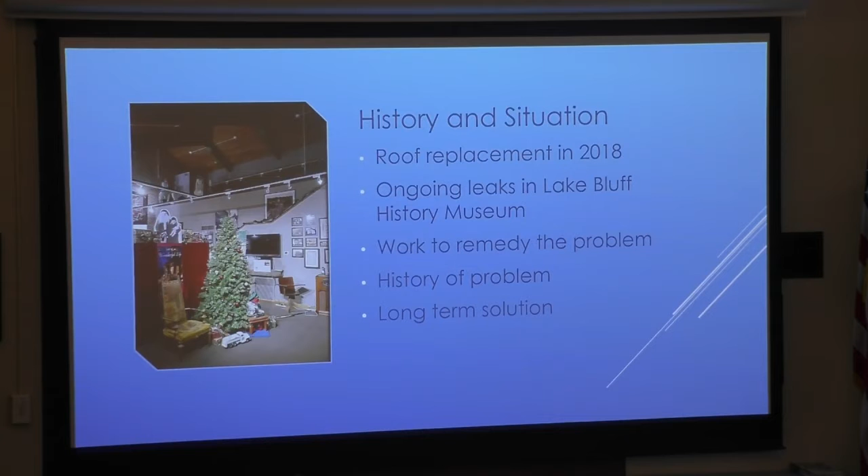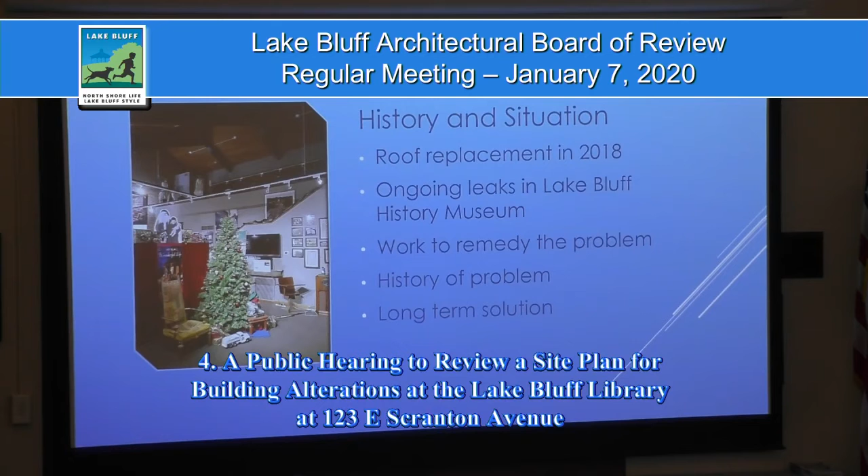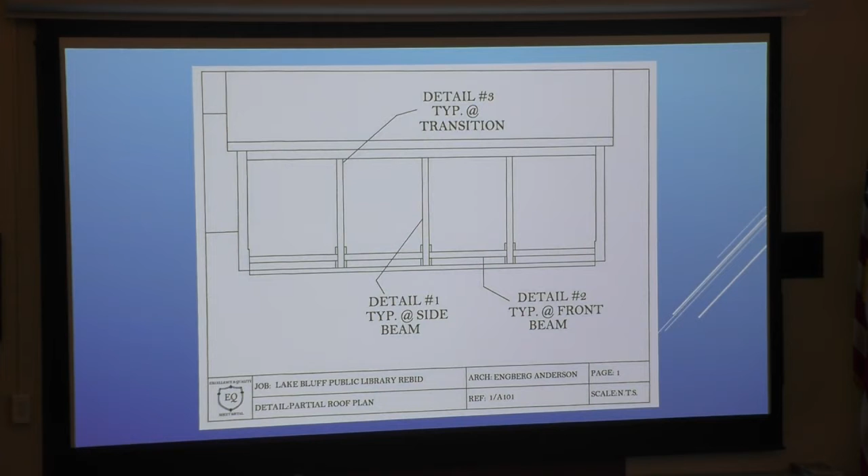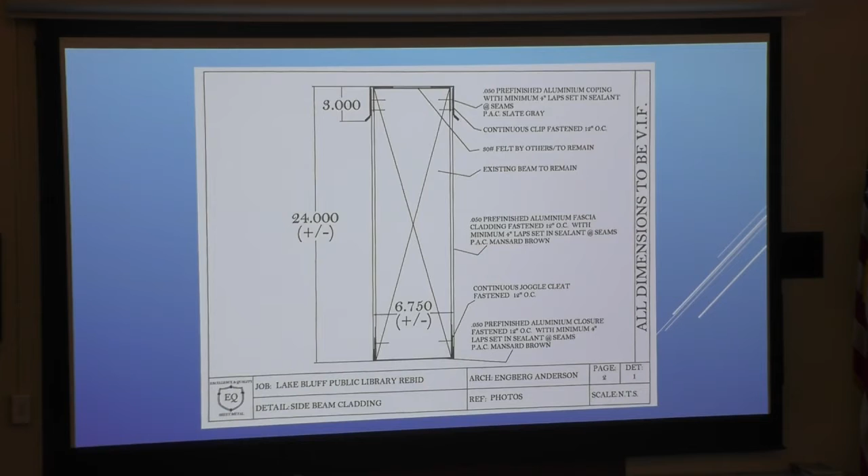The portion that sticks out from the building, out from the roof, that's not visible in the picture here, and no cladding on the beams that are visible inside the building. I have, and you have in your packets, some details on the technical aspects of what that would entail with the cladding. I'm happy to answer any questions about that. We'll circle back if anyone has questions, and hop past that for now to focus more on the architectural elements.

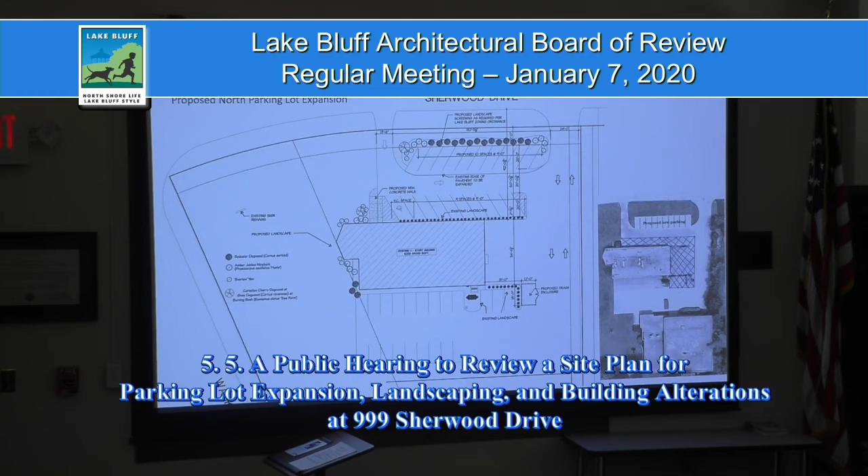As part of this presentation, we've also been told there is a need to enclose the dumpsters, which are currently on the property, and I've found out recently serve both buildings. That is something that we will need to discuss with Smedbo. Per our lease agreement, we have access to the current area where the dumpsters are, so we proposed fencing these in as per the requirement. But I have been trying to get in contact with the president of Smedbo, because then they will not have a place for their dumpsters. My understanding is that gentleman returns today.

I wanted to get all of this done and ironed out before presenting to you, but as a result of our time constraints that were put on us from our lease agreement, I am presenting what I have thus far. So currently this is what we are proposing to do, but there will be an issue of 2 more dumpsters to be located on the property that we will need to work out with Smedbo organization to determine where they are going to locate their 2 dumpsters. I don't believe this is an issue that anyone was aware of until we started actually submitting applications to you, and then we found the requirement to fence in the dumpsters.

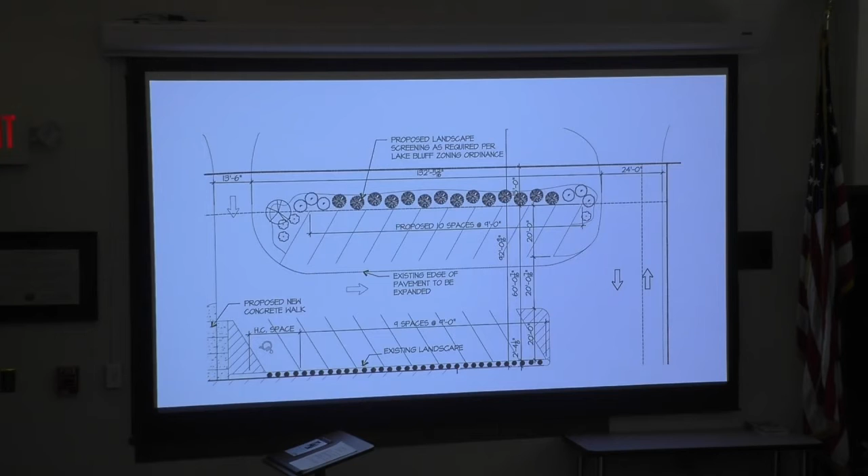The other thing we would like to propose is we are leasing the building. We don't own the building, we don't own the property, but we would like to help make the area look a little nicer. I think part of the landscaping around the new proposed parking lot would do that. We'd like to add some architectural details to the north and west elevation.

So we're proposing some aluminum cladding, awning roof design, and some over the windows. This was a second option. I think we would prefer this first option to just tie in the rest of the building. This would wrap around all the glass front that wraps around from the north to the west.

It was recommended that we also add an extra element to try to cover the existing HVAC units on the roof line. So we have that, we added extra along the west elevation to try and accomplish that.

Details of our dumpster enclosure design: it's 6 foot, wood fence, metal posts concreted into the ground. The metal elements, posts would be on the interior of the structure.

And again, I apologize, we do not have final color designs right now because we are still in the, really just executed our lease and trying to get through the contingency stage of our lease. But we are definitely looking to enhance the building with a taupey kind of a color that will bring out and stand out without being intrusive.

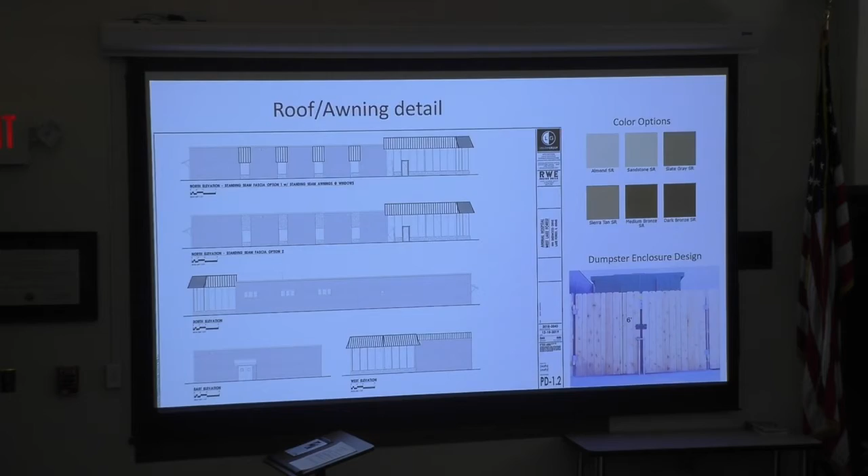That's what I have for you. I'd be happy to answer questions anyone who has.

Okay, thank you. I know I'm not starting the question, but can you go back just to the original photograph, the photographs of the original building, so we can have that as a reference? Thank you.

So right now, currently, there's not much in the way of landscape anywhere near the parking area. There's no landscape. There's some bushes at the front entry, and that's about it.

Tim, start at your end. Okay.

Yeah, I think the parking would fill a need, obviously. I think the first parking spot when you're coming in to the lot, that corner—if you can bring that up—yeah, so if you're going to turn into that first spot, you're going to have a hard time. But this right here I'm thinking, yeah, right there. I think that's going to get run over a lot. That's the only thing that kind of, you know. Okay.

Other than that, the landscaping looks good. And I know you need more spots to park, so.

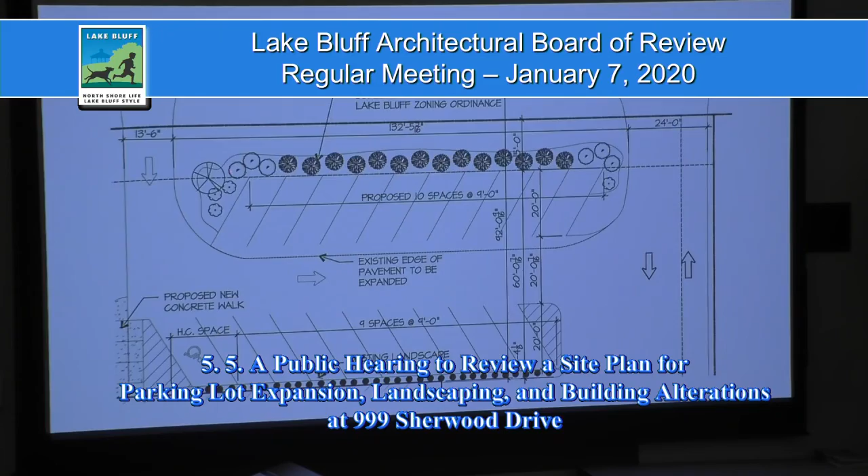Yeah. What is the landscaping? It's just that the plantings around the new parking. No, I mean, I'm just wondering what the plant material is. So I've got.

Red osier, I'm probably mispronouncing these names. Red osier dogwood, kind of in the middle here. Those tend to get anywhere from 4 feet up to 7 feet high, probably even more if you let them, but we probably would keep them somewhat tame.

These are some ninebark, Amber Jubilee ninebark that can get 4 or 5 feet tall, stay kind of bushy. And then we have some low yews in the landscape.

This is yet to be determined, a little accent plant—my eyes are not as good either. We have a proposal for either a cornelian cherry dogwood or a gray dogwood or possibly even like a burning bush. We have yet to finalize the landscape.

This was our first kind of go around with our landscape professional. I do want to make sure that we have looked to see that these are tolerant to salt and good plantings for a parking lot type of environment.

And so with the separate specimen planting, I wanted to just get a little more information on which variety would go best there and not wither in that area. So I don't know if that answers your question as to what's presented today.

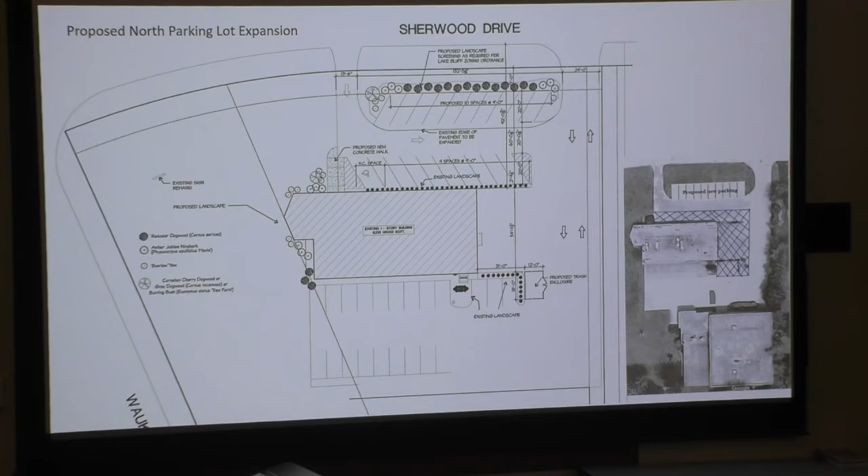Neil? I agree with the observation Tim made, it's a good observation that the one part of it will get run over. Yeah.

On the building, you show two options for the north elevation. Which one are you leaning toward? Yes, the top one. I think it aesthetically adds more to the building.

I might be speaking for Dr. McCann as well. Our goal is to improve the aesthetic of the building. If the board felt strongly that those extra awnings didn't do so, we have no objection to going without them.

We thought it added something extra to that side. That's the main thing people see when they come in. And we felt it would tie the roof line across that glass much better, but that's not something we have to stick with. Just take that all the way across.

One question I do have is in the lower right corner, you show the west elevation with that portion that's been added toward the back or toward the side. This part right here? Yes, we would be adding. What happens when it turns the corner? It stops there, so there is no south elevation roof line.

I don't know if I've got a picture. So we'd have awnings over the windows here, and then once the glass starts, which is right about here, it would be a full roof element to there, because that's all over the glass, and then this elevation would be just the top of the roof. None of this, and nothing on top of the roof along here.

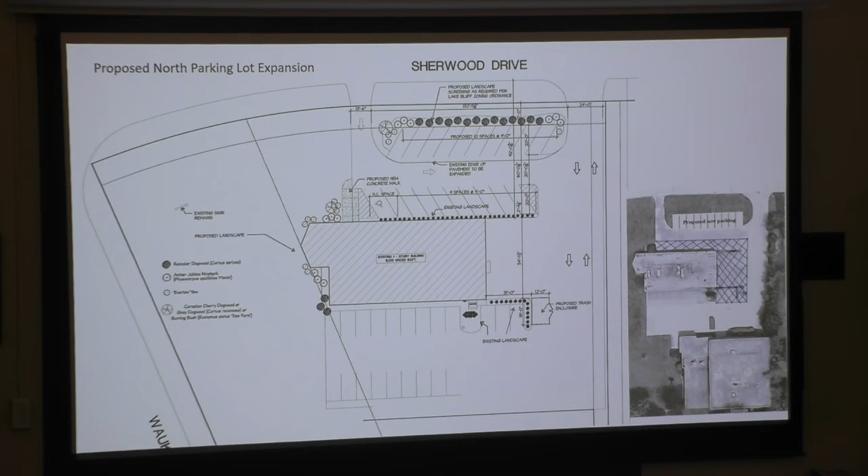So this addition - I'm going the wrong way, sorry. This was recommended to us to include. We did not have this on our first submission. My thought originally was just to enclose the glass, to tie everything together so all the glass is covered. The full glass is covered by full awning, and the smaller windows would be covered by the smaller awnings.

But a good point was brought up that there are HVAC units that are visible currently, pretty large ones. So the thought was maybe we try to help cover some of those from the road as well. I have no objection to not doing that part and keeping it just over the glass, because I think that would still look nice.

See what everybody else's comments are. Absolutely, I certainly think the awnings help the building, for sure. And if I had a vote on it, I would go with the top one with the awnings over the windows as well. Bob had brought up an interesting point that another way to do it would be to maybe do spandrel glass instead of whatever that stone material is there, as an alternative to the awnings over the windows.

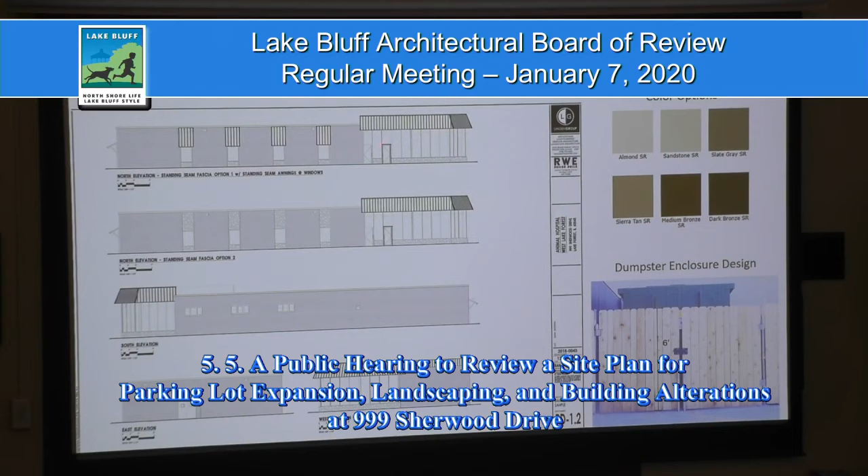So just something to throw out there. Right now, if you go to the top elevation in your proposed design, currently you have the awnings over the windows, correct? Yes. So all I'm suggesting is if you wanted to eliminate that over the windows, you could remove the stone and do a spandrel glass window so it just looks like all glass, by removing this stone. That's right. Okay, yeah, that could be a good aesthetic.

I guess our concern or our goal here, we don't own this building, and we're trying to get in and improve it without trying to add too much - budget. Yeah, I get it. It would be, if we could have bought the building, this would be a whole different discussion. So our lease is the building as-is, so anything we're doing to it, we're trying to do to improve it. But no, I agree, it would keep the glass looking the same all the way across.

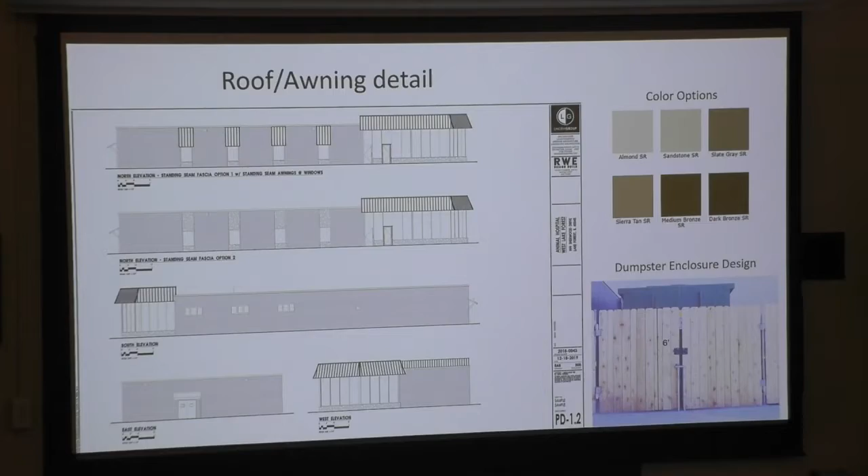Sheree? I think the awnings are better than the existing. Just make sure that you match the same width of the panel, with ribbing, with what's over the entrance. Sure, yeah, it would be all absolutely.

I don't know if I specified - currently I believe there is one door. This one is what's current, and we will be adding this second one, which is why we redid the walk. There's not much of a walk there now, it's pretty broken up concrete, so we would like to redo that with a nice wide walkway, obviously compliant with all the specifications, so it'll be double width.

Matt, you're done? Yeah, I'm done.

Before I get to the awning part, on the site plan, on the east elevation, where you have that single door, what happens in that whole area? Is it right here? That big open area, what's that? Currently, that's a bunch of Chevy trucks being parked there.

Our goal, since we have access to this, is we are likely going to put our staff back here in a manner that's conducive to getting in and out. That's our back entrance. We'll likely get standard deliveries through the back, though they could also come through the front. We have these 3 parking spots, and we feel we can easily get 4, 6 other vehicles. There's actually quite a large area back here.

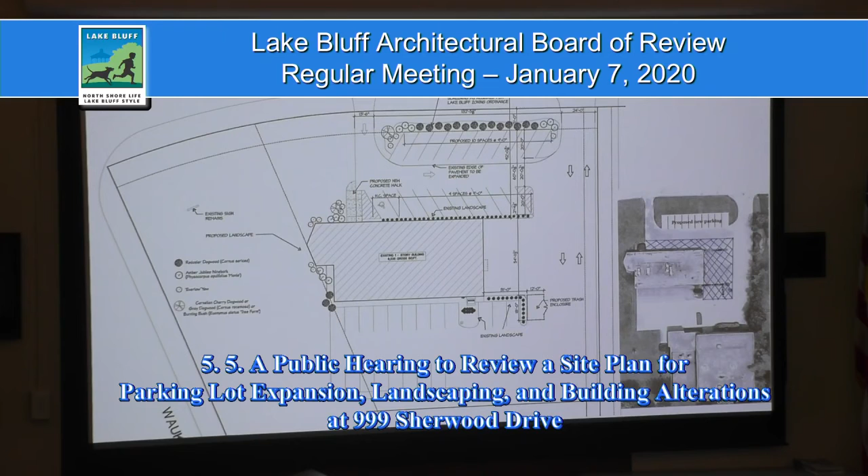And then if you don't mind going to the elevations. So I'd love standing seam. I don't know, it's a tough building. It's a great old modern building, right, and it has some good details in it. It feels like it's gonna look kind of like you're applying these awnings to an old tired building, and you're gonna have this brand shiny new awning on it. So it's a tough one. I'm not saying don't do it.

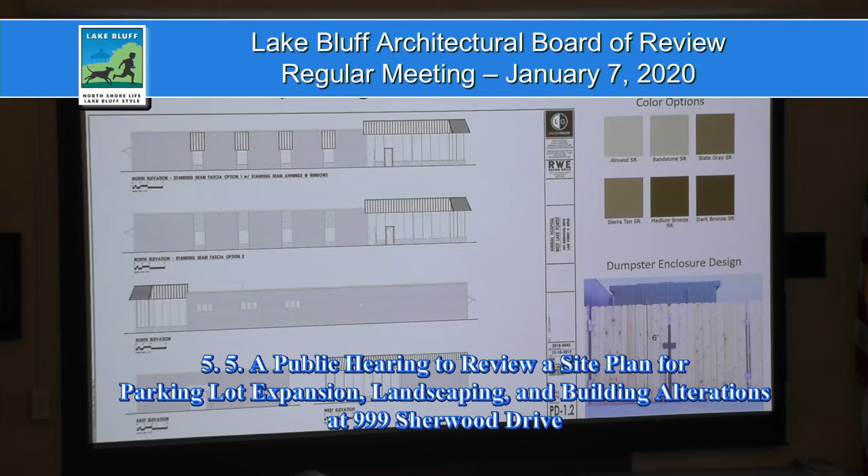I like the idea. I was thinking about replacing that stone, and I get why you don't want to go through that money, but almost celebrate what it is. It has a nice quality where the materials were updated, where the stone is, with a different material. That's a number you don't want to spend, so I'm just a little concerned it's going to look like a repurposed Wendy's or something, just because it's a restaurant detail.

Sure. We actually thought it fit well with the corner. We looked at another design, but that was just a big box, vertical, and that looked more like a Target to me, or a warehouse kind of thing. But I'm a little concerned it's going to feel applied instead of fully integrated.

It's tough on these, we've all dealt with this type of project, so I appreciate the struggles and where you are with it. My little concern is that, but I think what you're trying to do is great, and we appreciate that for the community.